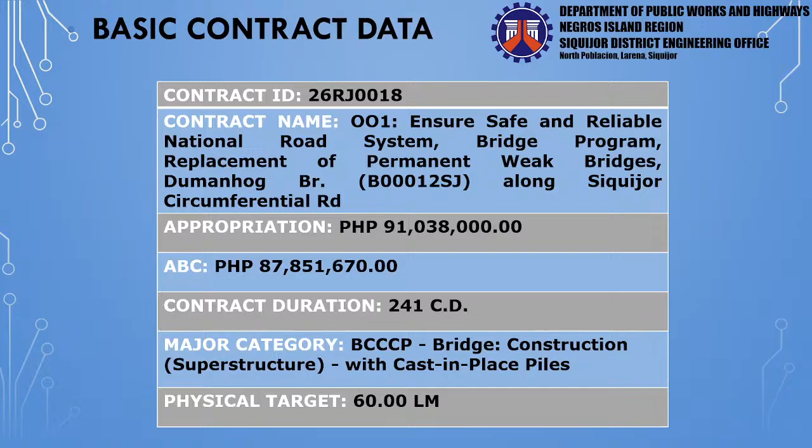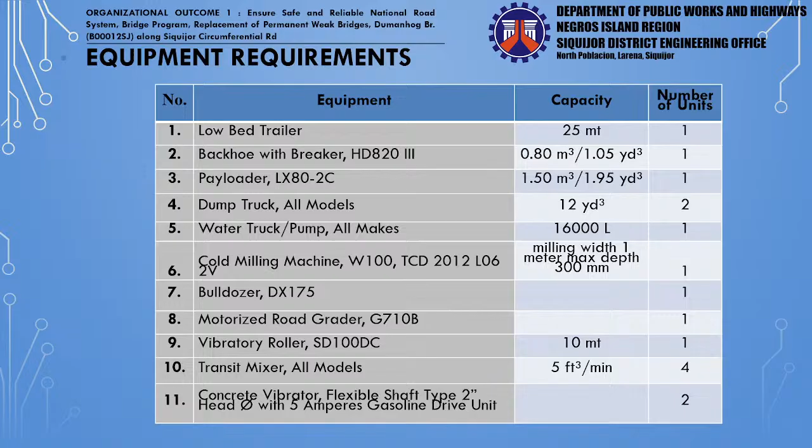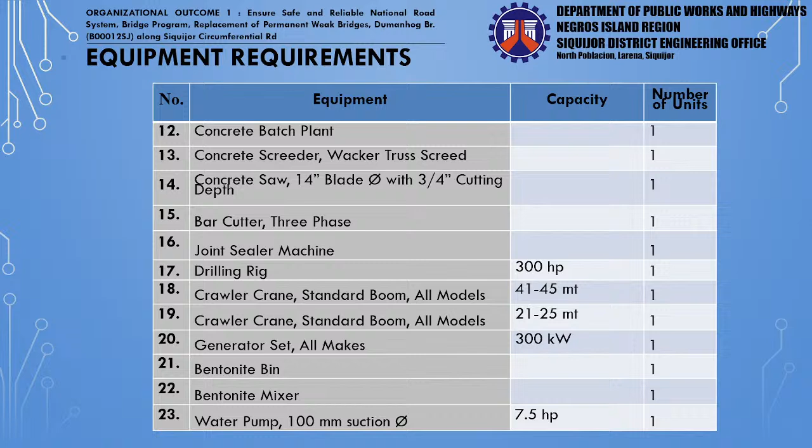One unit of bulldozer DX175, one unit of motorized road grader G710B, one unit of vibratory roller SD100DC with a capacity of 10 metric tons, 4 units of transit mixers, all models, with a capacity of 5 cubic feet per minute, 2 units of concrete vibrator flexible shaft type, 2-inch head diameter with 5 amperes gasoline drive unit, 1 unit of concrete batch plant, 1 unit of concrete screeder Wacker truss screed, 1 unit of concrete saw 14 inches blade diameter with 3/4 cutting depth, 1 unit of bar cutter 3-phase, 1 unit of joint sealer machine, 1 unit of drilling rig 300 HP, 1 unit of crawler crane standard boom all models 41 to 45 metric tons, 1 unit of crawler crane standard boom all models 21 to 25 metric tons, 1 generator set all makes 300 kilowatts, 1 bentonite bin, 1 bentonite mixer, 1 water pump 100mm suction diameter with a capacity of 7.5 HP.

One unit bar bender, 25 mm maximum rebar diameter, 3-phase. One unit bar cutter, 25 mm maximum rebar diameter, grade 40, single phase. One unit welding machine, electric driven DC output, 500 amperes. One unit cutting outfit, one unit tremie pipe set, one SPT and desanding machine, 2 units portable breaker BHF30S, one unit air compressor, all models.

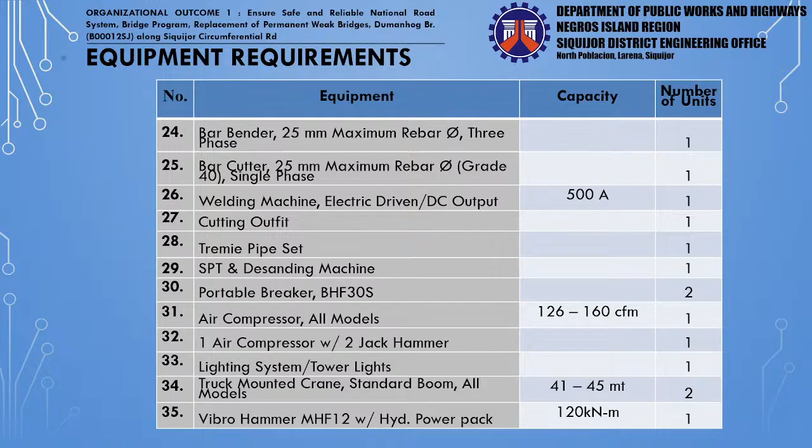126 to 160 CFM. One air compressor with 2 jackhammers, one lighting system tower or tower lights, 2 units truck mounted crane standard boom, all models, 41 to 45 metric tons, one vibro hammer MHF 12 with hydraulic power pack, 120 kilonewton meter. One unit welding machine, gas or diesel driven, 500 amperes.

One pile integrity testing and accessories. One grinding machine and accessories. One dynamic pile testing. One drop hammer with accessories, 20 metric tons. Service crane, 21 to 25 metric tons. One cargo or service truck, all models, 9 to 10 metric tons.

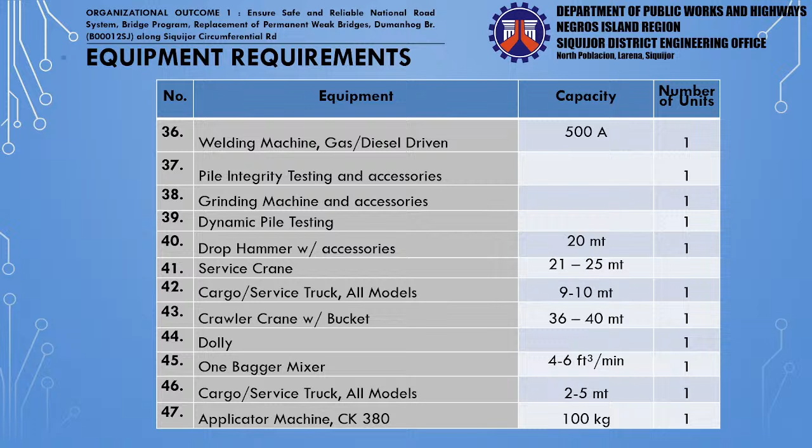One crawler crane with bucket, 36 to 40 metric tons, one dolly, one bagger mixer, 4 to 6 cubic feet per minute, one cargo service truck, all models, 2 to 5 metric tons, one applicator machine CK380, 100 kilograms, one kneading machine YD 300 kilogram per cylinder, hydraulic double cylinder, one unit telescopic man lift, 15 meter max working height.

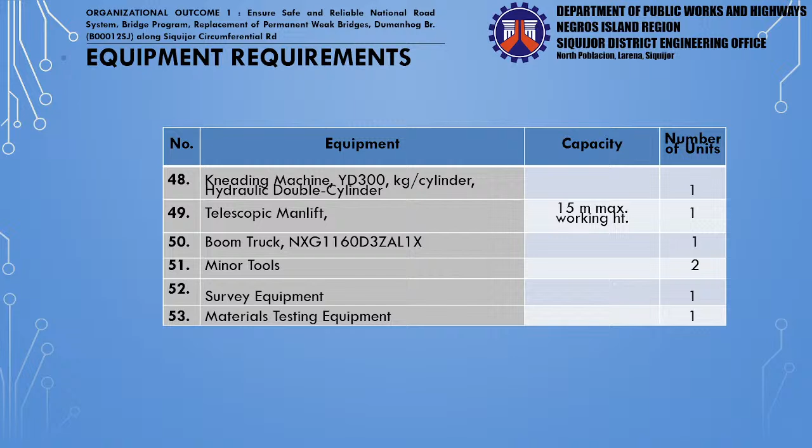One boom truck NXG1160D3ZAL1X, 2 units minor tools, one survey equipment, and one materials testing equipment.

Second project is 26RJ0050-01, ensure safe and reliable national road system, network development program of off-carriageway improvement, secondary roads, Siquijor-Bolos-San Juan Road, kilometer 63 plus minus 10 to 64 plus 620, kilometer 64 plus 620 to 64 plus 760.

Kilometer 65 plus 379 to 65 plus 589, kilometer 65 plus 726 to kilometer 65 plus 738, kilometer 65 plus 894 to kilometer 65 plus 925, kilometer 66 plus 16 to kilometer 69 plus 518, kilometer 66 plus 290 to kilometer 69 plus 518.

Appropriation is 51,940,000 with an ABC of 50,122,100 pesos. Contract duration is 139 calendar days with a major category RCP roads construction PCCP. Physical target is 5.525 square meters.

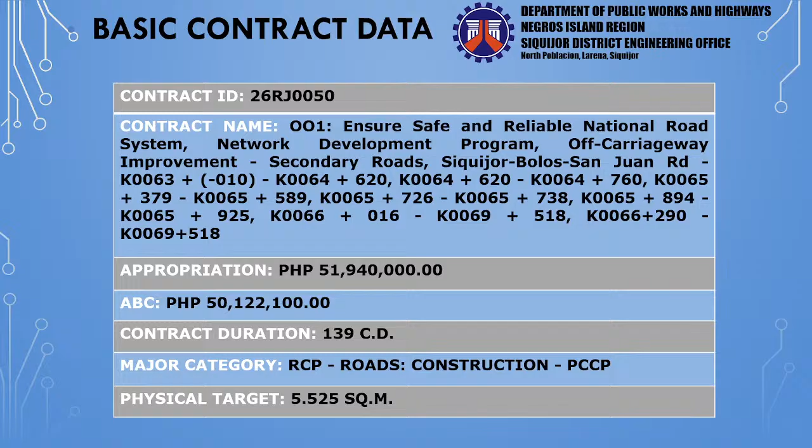For the equipment requirements: 1 unit low bed trailer, 25 metric tons, 1 backhoe HDA823 with a capacity of 0.80 cubic meter or 1.05 cubic yards, 2 units payloader LX80-2C 1.5 cubic meter or 1.95 cubic yards, 2 units dump truck, all models, 12 cubic yards, 1 motorized road grader G710B, 1 bulldozer DX175.

1 vibratory roller SD100DC, 10 metric tons. 1 water truck pump all makes 16,000 liters. 4 units transit mixers all models with a capacity of 4 cubic feet per minute. 2 concrete vibrator flexible shaft type 2-inch head with 5 amperes gasoline drive unit.

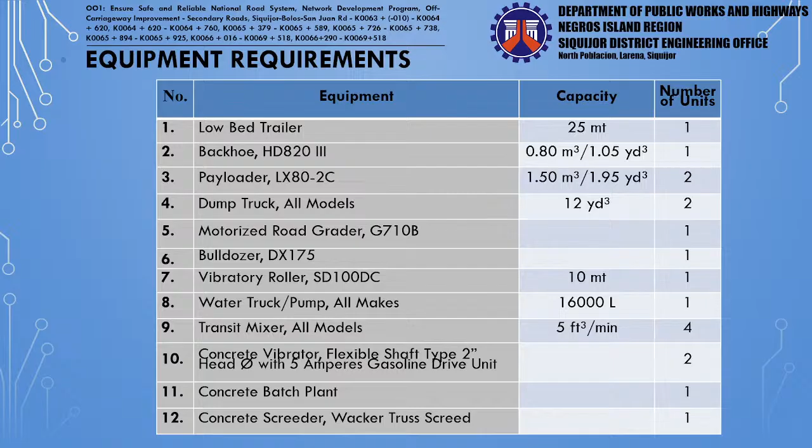1 concrete batch plant. 1 concrete screeder Wacker truss screed. 1 concrete saw 14-inch blade diameter with 3/4 cutting depth. 1 bar cutter 3-phase. 1 joint sealer machine.

1 telescopic man lift 15-meter maximum working height. 1 boom truck NXG1160D3ZAL1X. 1 plate compactor 400 to 500 gasoline engine.

1 bar cutter 25 mm maximum rebar diameter grade 40 single phase. 1 bar bender 25 mm maximum rebar diameter 3-phase. 1 bagger mixer with a capacity of 4 to 6 cubic feet per minute. 1 backhoe wheel-mounted PW60N-1.

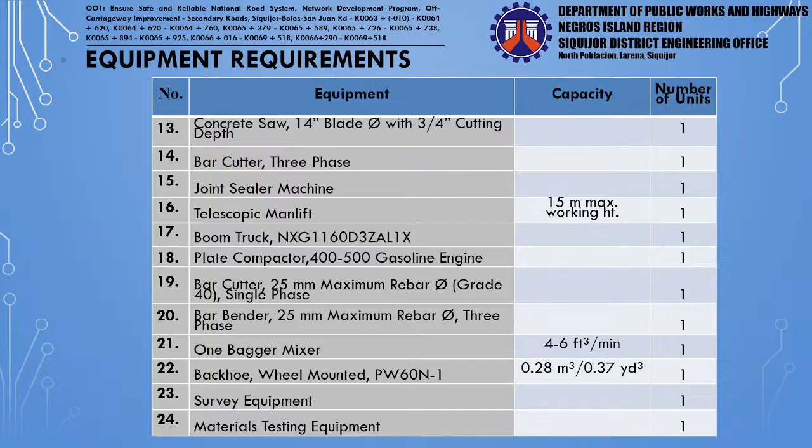0.28 cubic meter or 0.37 cubic yards. 1 survey equipment and 1 materials testing equipment.

Next project is 26RJ0051-001, ensure safe and reliable national road system, asset preservation program, preventive maintenance, secondary roads, Siquijor circumferential road, kilometer 42 plus 337 to kilometer 43 plus 00.

With appropriation of 20,803,000 with an ABC of 20,386,940 pesos. Contract duration is 67 calendar days under major category RRA roads, rehabilitation, asphalt. Physical target is 0.662 kilometers.

So this is the location map of the project. For the equipment requirements: 1 low bed trailer with the capacity of 25 metric tons, 1 backhoe HD820 III.

With a capacity of 0.80 cubic meter or 1.04 cubic yards, 1 unit bulldozer DX175, 2 units payloader LX80-2C with a capacity of 1.5 cubic meter or 1.95 cubic yards, 2 dump truck, all models, with a capacity of 12 cubic yards, 1 motorized road grader G710B, 1 vibratory roller SD100DC with a capacity of 10 metric tons.

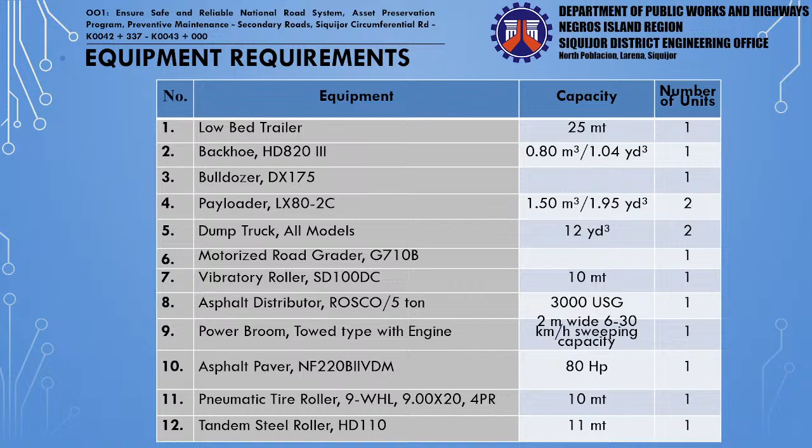1 pneumatic tire roller 9-WHL 9.00 by 20, 4PR with a capacity of 10 metric tons. 1 tandem steel roller HD110 with a capacity of 11 metric tons. 1 water truck or pump all makes 16,000 liters.

1 cargo or service truck all models 2 to 5 metric tons. 1 applicator machine CK380 100 kilograms. 1 kneading machine YD 300 kilogram per cylinder hydraulic double cylinder. 1 telescopic man lift with a capacity of 15-meter maximum working height.

1 boom truck NXG1160D3ZAL1X. 1 plate compactor 400 to 500 gasoline engine. 1 bar cutter 25 mm maximum rebar diameter grade 40 single phase.

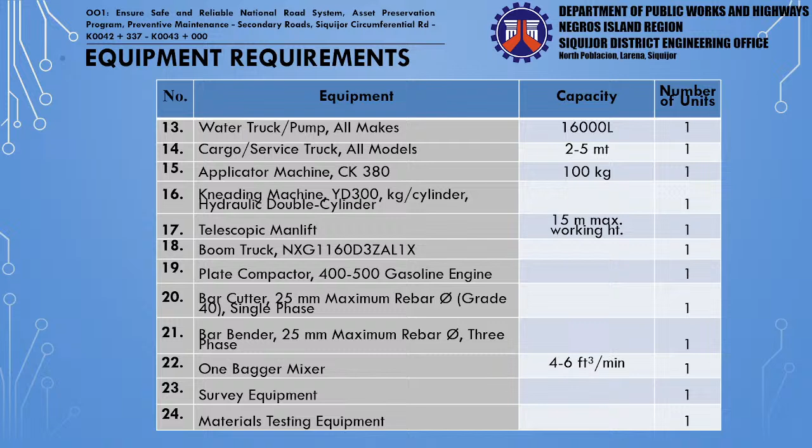1 bar bender 25 mm maximum rebar diameter 3-phase. 1 bagger mixer with a capacity of 4 to 6 cubic feet per minute. 1 survey equipment and 1 materials testing equipment.

Next project is 26RJ0052.

001 ensures safe and reliable National Road System Asset Preservation Program, Preventive Maintenance, Secondary Road, Siquijor Circumferential Road, Kilometer 43 plus 00 to Kilometer 43 plus 626.

Appropriation is 19,857,000 with an ABC of 19,459,860 pesos. Contract duration is 66 calendar days under major category RRA roads, rehabilitation, asphalt.

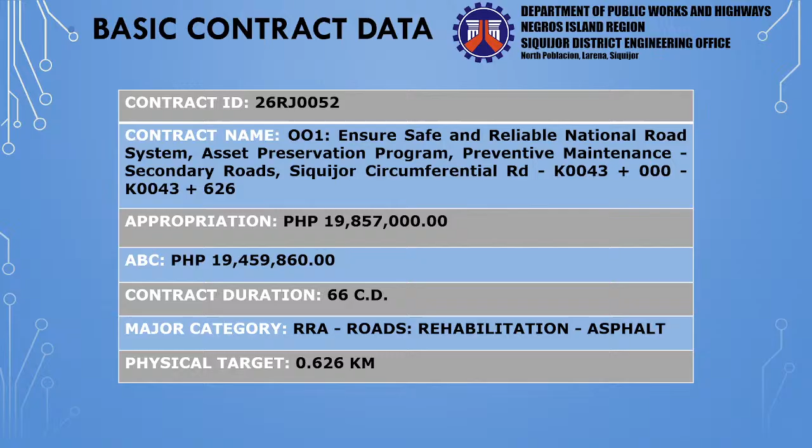Physical target is 0.626 kilometers. This is the location map of the project.

The equipment requirements: one low bed trailer with a capacity of 25 metric tons, one asphalt distributor ROSCO/5 ton, 3,000 USG, one power broom tow type with engine, 2 meter wide, 6 to 30 kilometers per hour sweeping capacity.

One asphalt paver NF220 BII VDM, 80 HP, one pneumatic tire roller 9-WHL 9.00 by 20, 4PR, 10 metric tons.

One tandem steel roller HD110 with a capacity of 11 metric tons, one water truck or pump all makes 16,000 liters, one cargo or service truck all models 2 to 5 metric tons, one applicator machine CK380 100 kilograms.

One kneading machine YD 300 kilograms per cylinder, hydraulic double cylinder, one backhoe HD820 III, 0.80 cubic meters or 1.05 cubic yards.

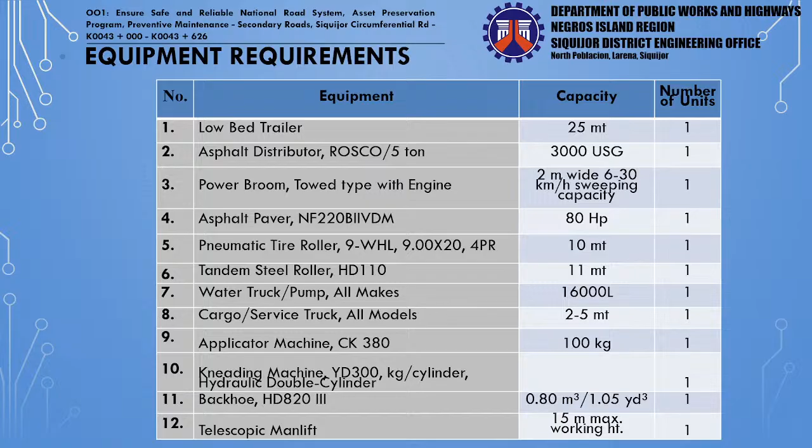One telescopic man lift, one boom truck NXG 1160D3ZAL1X, one plate compactor 400 to 500 gasoline engine, one bar cutter 25 mm maximum rebar diameter grade 40 single phase.

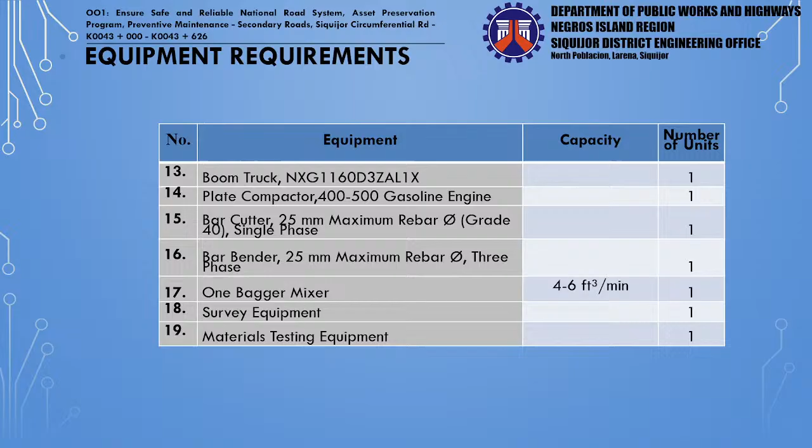One bar bender 25 mm maximum rebar diameter 3 phase, one bagger mixer 4 to 6 cubic feet per minute, one survey equipment, and one materials testing equipment.

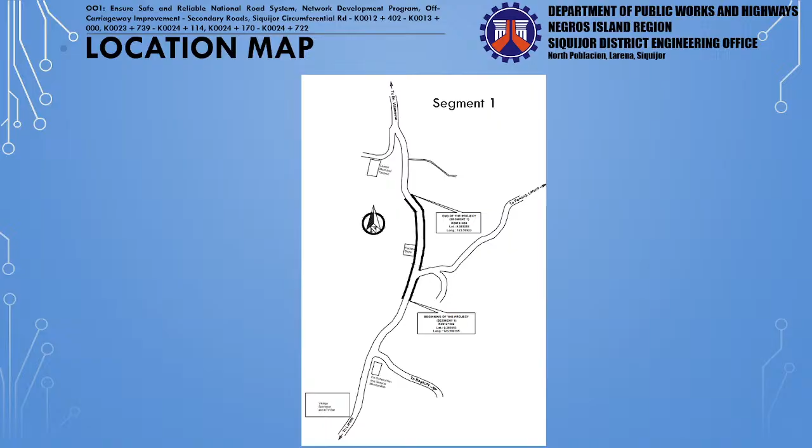16,326,800. Contract duration of 80 calendar days with major category RCP roads construction PCCP with a physical target of 1.525 kilometers. And this is the location of the projects. These are the location of the project.

Equipment requirements: one unit of low bed trailer 25 metric tons, two units of payloader LX80-2C of 1.5 cubic meters or 1.95 cubic yards, two units of dump truck all models 12 cubic yards.

One unit of motorized road grader G710B, one unit of bulldozer DX175, one unit of vibratory roller SD100DC 10 metric tons, one unit of water truck or pump, all makes 16,000 liters, four units.

Of transit mixer, all models, with a capacity of 5 cubic feet per minute, two units of concrete vibrator, flexible shaft type, 2 inches head diameter with 5 amperes gasoline drive unit, one unit of concrete batch plant.

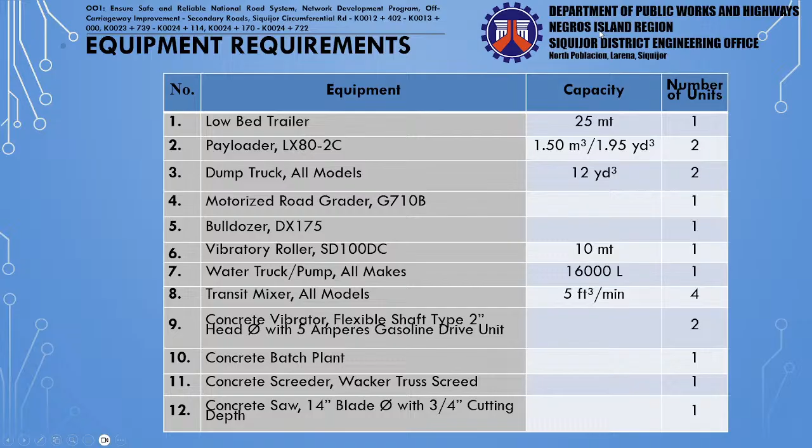One unit of concrete screeder, Wacker truss screed, 1 unit of concrete saw 14 inches blade diameter with 3/4 inches cutting depth. 1 unit of bar cutter 3-phase, 1 unit of joint sealer machine, 1 unit of survey equipment, and 1 unit of material testing equipment.

Next project, 25RJ0054, Convergence and Special Support Program, Sustainable Infrastructure Projects Alleviating Gaps, Access Road and/or bridges from national roads leading to major strategic buildings, facilities.

Rehabilitation of road, Cangclaran-Cangumantong, Barangay Cangclaran, Lazi, Siquijor, Station 5+618, Station 6+436.

Appropriation of 41,160,000 and the ABC of 40,336,800 with contract duration of 100 calendar days.

For equipment requirements: 1 unit of low-bed trailer, 25 metric tons, 1 unit of backhoe with breaker, HDA 20 III.

0.8 cubic meters or 1.05 cubic yards, 1 unit of chainsaw, Husqvarna 2100 CD with CR22 of 7 feet reach and 9 inches standard blade.

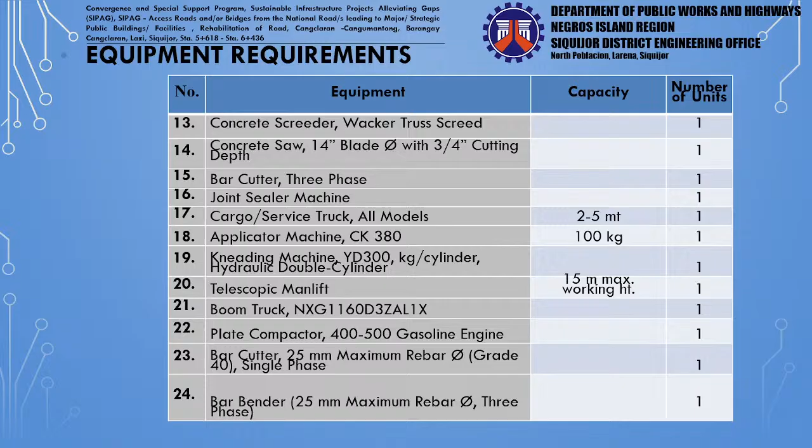1 unit of plate compactor, 400 to 500 gasoline engine. 1 unit of bar cutter, 25 mm maximum rebar diameter, grade 40, single phase. 1 unit of bar bender, 25 mm maximum rebar diameter, 3-phase.

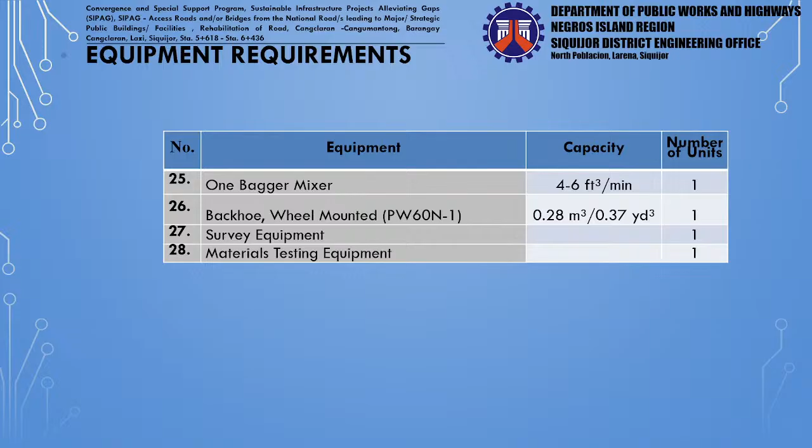1 unit of 1 bagger mixer, 4 to 6 cubic feet per minute. 1 unit of backhoe wheel-mounted PW60N-1 of 0.28 cubic meters or 0.37 cubic yards. 1 unit of survey equipment, and 1 unit of material testing equipment.

Next project, 26RJ0055, Convergence and Special Support Program, Sustainable Infrastructure Projects Alleviating Gaps, SIPAG, access roads and or bridges from national roads leading to major strategic buildings, facilities, rehabilitation road.

Kimba-Cang-atuyom-Ponong, Barangay Kimba, Lazi, Siquijor, Station 10+505 to Station 11+323 with an appropriation of 41,160,000 and ABC of 40,336,800, contract duration of 125 calendar days. Major category are RCP roads, construction PCCP, and physical target of 818 meters.

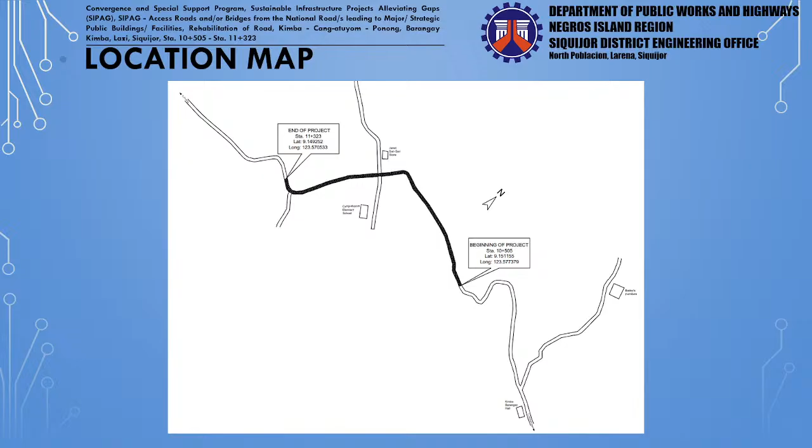For equipment requirements, 1 unit of low bed trailer, 25 metric tons, 1 unit of backhoe with breaker, HD20 III with a capacity of 0.8 cubic meters or 1.05 cubic yards.

1 unit of chainsaw, Husqvarna 100 CD with CR22, 7 feet reach, 9 inch standard blade. 2 units of payloader LX80-2C with a capacity of 1.5 cubic meters or 1.95 cubic yards.

2 units of dump truck, all models, 12 cubic yards. 1 unit of motorized road grader.

G710B. 1 unit of bulldozer DX175. 1 unit of vibratory roller SD100DC, 10 metric tons.

1 unit of water truck or pump, all makes with a capacity of 16,000 liters. 4 units of transit mixer, all models, 5 cubic feet per minute.

2 units of concrete vibrator, flexible shaft type, 2 inches head, with 5 amperes gasoline drive unit. 1 unit of concrete batch plant.

1 unit of concrete screeder, Wacker truss screed. 1 unit of concrete saw, 14 inches blade diameter with 3/4 inches cutting depth.

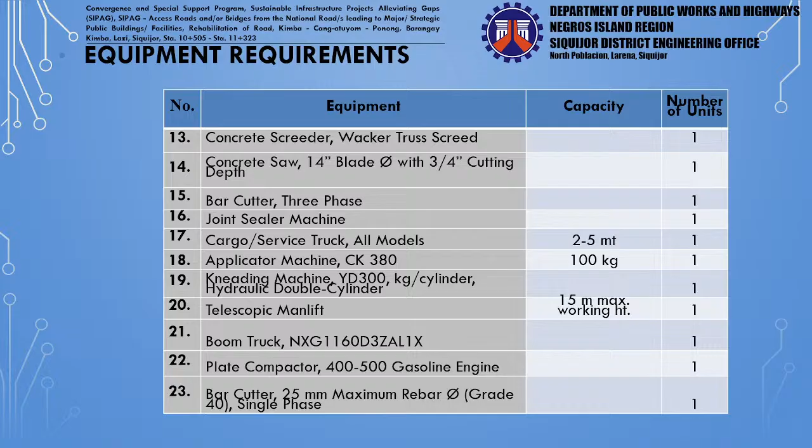1 unit of bar cutter, 25 mm maximum rebar diameter, grade 40, single phase. 1 unit of bar bender, 25 mm maximum rebar diameter, 3-phase.

1 unit of 1 bagger mixer, 4 to 6 cubic feet per minute. 1 unit of backhoe wheel-mounted PW60N-1 with a capacity of 0.28 cubic meters or 0.37 cubic yards.

1 unit of survey equipment and 1 unit of materials testing equipment. Next project,

26RJ0056, Convergence and Special Support Program, Sustainable Infrastructure Projects, Alleviating Gaps, SIPAG, access roads and or bridges from national roads leading to major strategic buildings or facilities, rehabilitation of road, Ponong-Luzong, Barangay Ponong, Siquijor, stationing 1+609 to station

2+447 with an appropriation of 42,140,000 and the ABC of 41,297,200. Contract duration of 126 calendar days with a major category of RCP roads construction PCCP and physical target of 838 meters.

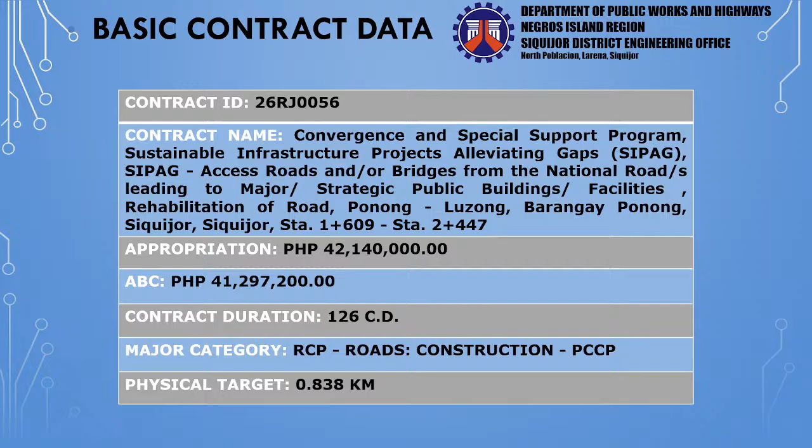For equipment requirements, 1 unit of low bed trailer, 25 metric tons, 1 unit of backhoe with breaker HDA20 III with a capacity of 0.8 cubic meters or 1.05 cubic yards, 1 chainsaw Husqvarna 210 CD with

CR22, 7 feet reach and 9 inch standard blade, 2 units of payloader LX80-2C with a capacity of 1.5 cubic meters or 1.95 cubic yards.

2 units of dump truck, all models, 12 cubic yards. 1 unit of motorized road grader G710B.

1 unit of bulldozer DX175. 1 unit of vibratory roller SD100 DC with a capacity of 10 metric tons.

1 unit of water truck or pump, all makes with a capacity of 16,000 liters. 4 units of transit mixer, all models, 5 cubic feet per minute.

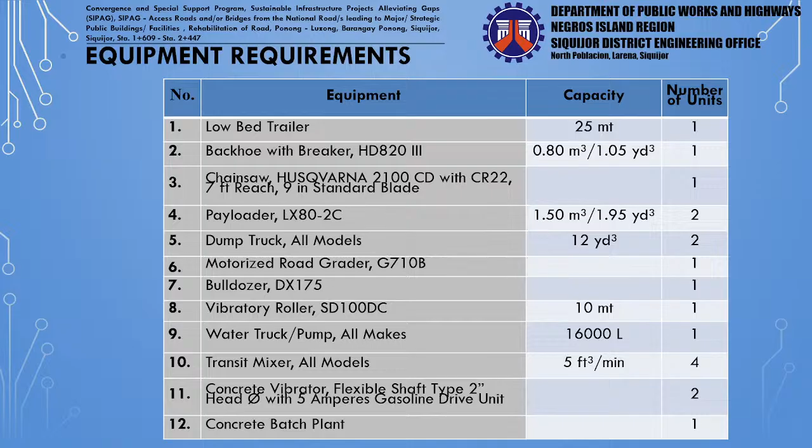2 units of concrete vibrator, flexible shaft type, 2 inches head diameter with 5 amperes gasoline drive unit. 1 unit of concrete batch plant.

1 unit concrete screeder, Wacker truss screed. 1 unit of concrete saw, 14-inch blade diameter with 3/4 inch cutting depth.

1 unit of bar cutter, 3-phase. 1 unit of joint sealer machine. 1 unit of cargo or service truck, all models, 2 to 5 metric tons.

1 applicator machine, CK380, 100 kilograms. 1 kneading machine, YD 300 kilogram per cylinder, hydraulic double cylinder. 1 telescopic man lift with 15 meters maximum working height.

1 boom truck, NXG1160D3ZAL1X. 1 plate compactor, 400 to 500 gasoline engine.

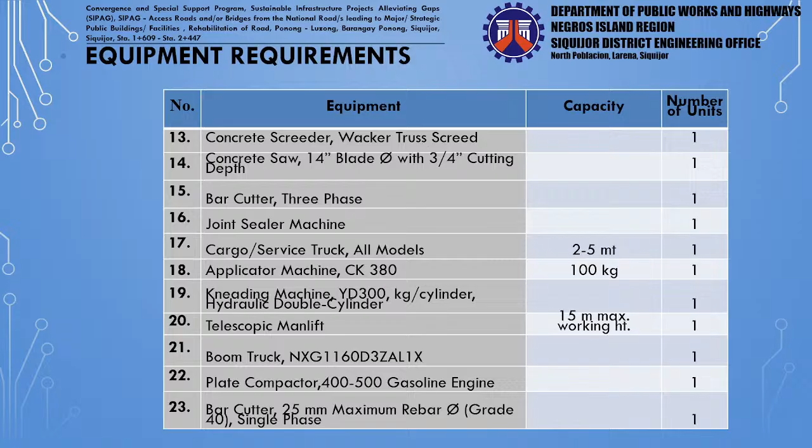1 bar cutter, 25 mm maximum rebar diameter, grade 40, single phase. 1 bar bender, 25 mm maximum rebar diameter, 3-phase.

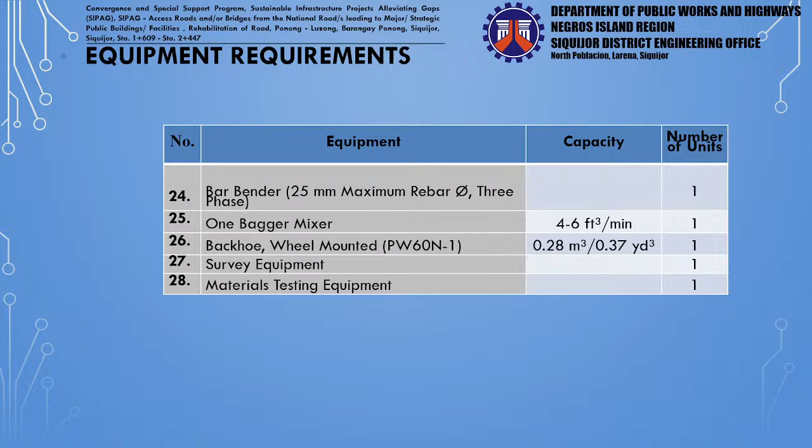1 unit of 1 bagger mixer, 4 to 6 cubic feet per minute. 1 backhoe wheel mounted, PW60N-1, 0.28 cubic meters or 0.37 cubic yards. 1 survey equipment and 1 material testing equipment.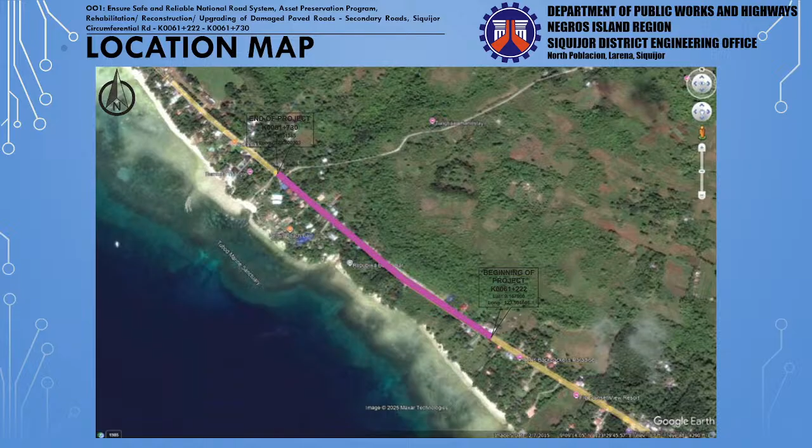For the last project, 26RJ0057, ensure safe and reliable national roads system asset preservation program, rehabilitation, reconstruction, upgrading of damaged paved roads, secondary roads, circumferential road, kilometer 61 plus 222 to kilometer 61 plus 730, with appropriation of 16,827,000 and ABC of 16,490,460 pesos. Contract duration of 113 calendar days and major category RCP road construction PCP and physical target of 508 meters. And this is the location of the project.

For equipment requirements: 1 unit of low bed trailer, 25 metric tons; 2 units of payloader LX80-2C, 1.5 cubic meters or 1.95 cubic yards; 2 units of dump truck, all models, 12 cubic yards; 1 unit of cold milling machine W100 TCD 2012 L062V with a capacity of milling width of 1 meter, maximum depth of 300 mm.

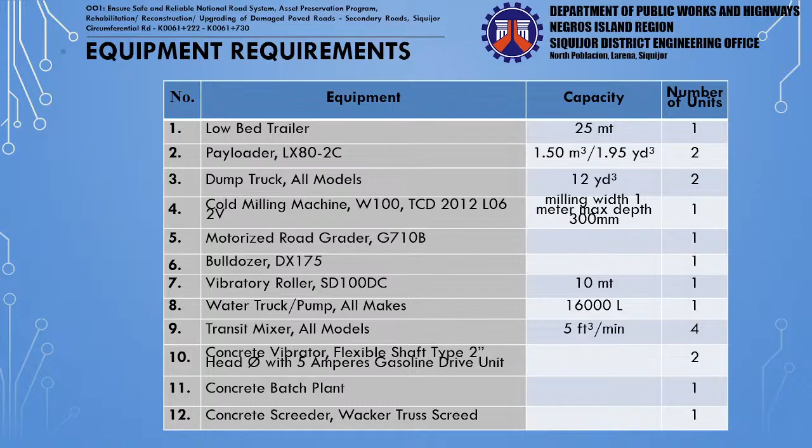1 unit of motorized road grader G710B, 1 unit of bulldozer DX175, 1 unit of vibratory roller SD100DC with a capacity of 10 metric tons, 1 unit of water truck or pump, all makes, 16,000 liters, 4 units of transit mixer, all models, 5 cubic feet per minute, 2 units of concrete vibrator flexible shaft type, 2 inches diameter, with 5 amperes gasoline drive unit, 1 unit of concrete batch plant, 1 unit of concrete screeder, Wacker truss screed.

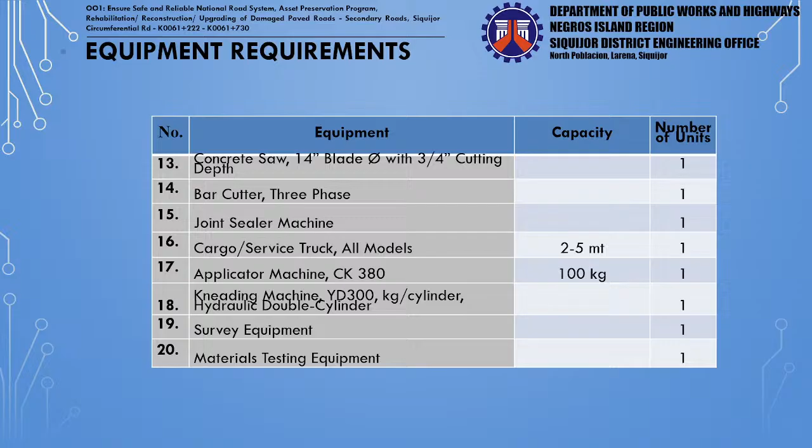1 unit of concrete saw, 14 inches blade diameter with 3/4 inches cutting depth; 1 unit of bar cutter, 3-phase; 1 unit of joint sealer machine; 1 unit of cargo or service truck, all models, 2 to 5 metric tons; 1 unit of applicator machine CK380 with a capacity of 100 kilograms; 1 unit of kneading machine YD 300 kilogram per cylinder, hydraulic double cylinder; 1 unit of survey equipment; and 1 unit of material testing equipment.

For minimum work experience requirements, the project manager and project engineer must have a minimum of 7 years of experience in the same position or similar experience. Materials engineer, 4 years minimum similar experience or position, and foreman, 5 years of similar experience or position.

The schedule of activities: dropping of bids is on May 26, 2026 until 9:30 a.m., and opening of bids is on May 26, 2026 at 10 a.m.

For the requirements of bidding documents, bidders shall submit their bids through their respective duly authorized representatives using the form specified in the bidding documents, in 2 separate sealed bid envelopes or in appropriate documents and file format for electronic bid submission as per the relevant guidelines, which shall be submitted simultaneously. The first shall contain the technical component of the bid, including the eligibility requirements under Section 52 of this IRR, and the second shall contain the financial component of the bid.